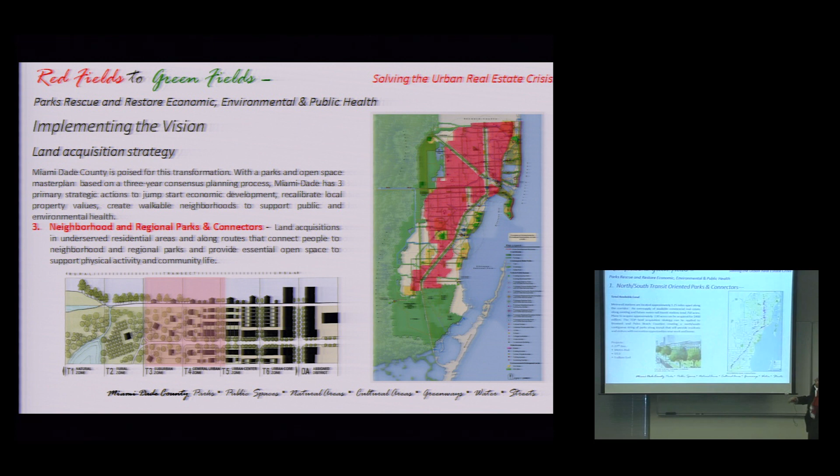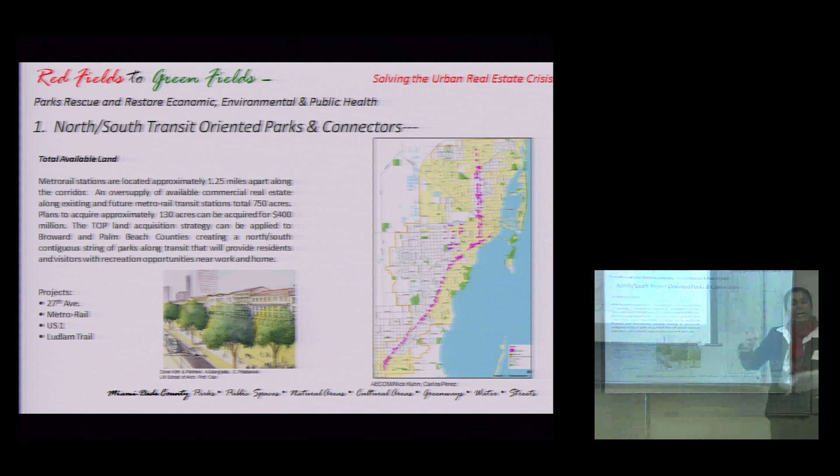Just some very brief images, and then we've got two other presentations. These are kind of the sites and the before and afters that we've been looking at in terms of how these sites would transform.

So we're looking at transit-oriented parks. This is a site specifically in downtown Miami, the core of Miami-Dade County. This is before and after. What we're looking at is transit and properties along it that are parking lots, empty sites, not in use now, and how can we recover them and make them usable for that area?

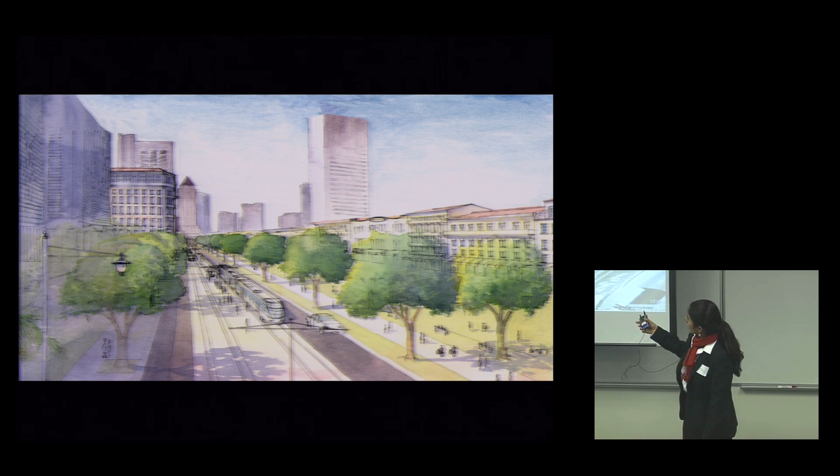This is another condition of a future transit line. What we're talking about is, once again, developing the transit-oriented park, and with the other slides that come with this, the evolution of the mixed use around it that we're developing now.

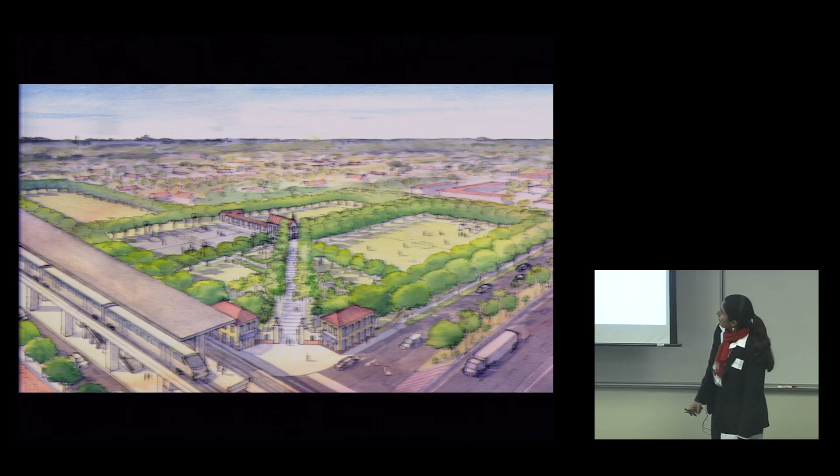Also, in terms of how these sites transform and really change the character of an area in terms of densification, when you have these connectors that may be very low density, they evolve to really include parks as the catalysts for how you redevelop in those areas.

Some of the discussions in our group involve a certain percentage of the developable land around it to generate revenue and other means of supporting this park. But equally important is the character of those areas, addressing issues of security, eyes on the street, and the kind of smart growth, new urbanist principles that we are applying to them.

This strategy of transit-oriented parks is one that can truly extend to the Tri-County region. In our case, it extends to Broward and Palm Beach.

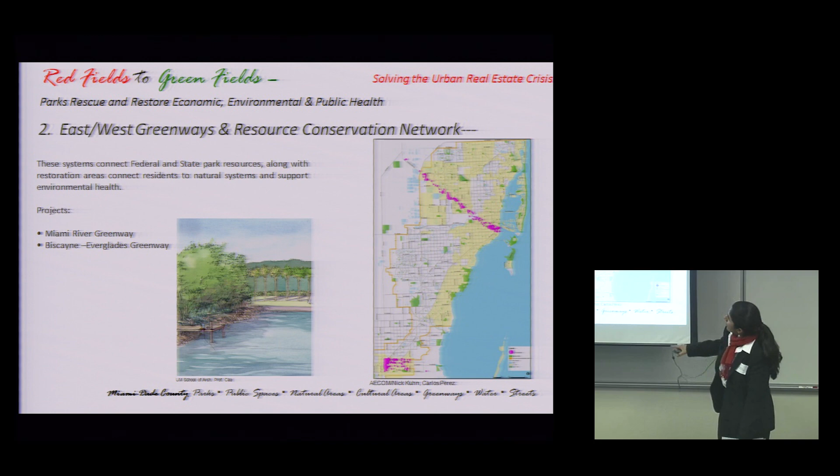Just some Miami River images, I'm going to quickly flip through this, and the Everglades Biscayne Greenway. This is a before image, and this is the after image.

And the neighborhood parks that we begin to look at. A lot of the sites we've looked at are commercial sites, but for Miami-Dade County, a huge amount of underutilized land is in the residential real estate market. So what happens with these sites where you're in a neighborhood and you have joining residential areas that are also failing? Parks as a catalyst can really begin to transform these areas.

For us, what it means is including things like workforce housing and affordable housing around them to really address those issues.

I'm just going to go through these next. This is one of our heritage parks that I mentioned, Greynolds Park, that we're looking at acquiring an interesting site there for a marina, transforming that area to serve as a mitigation site and a marina expansion site for the park.

So what are the impacts of a land acquisition strategy? John is going to talk about that.

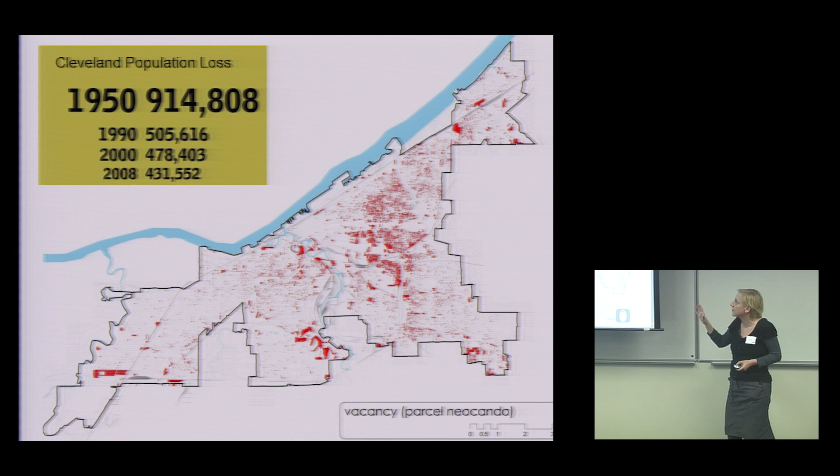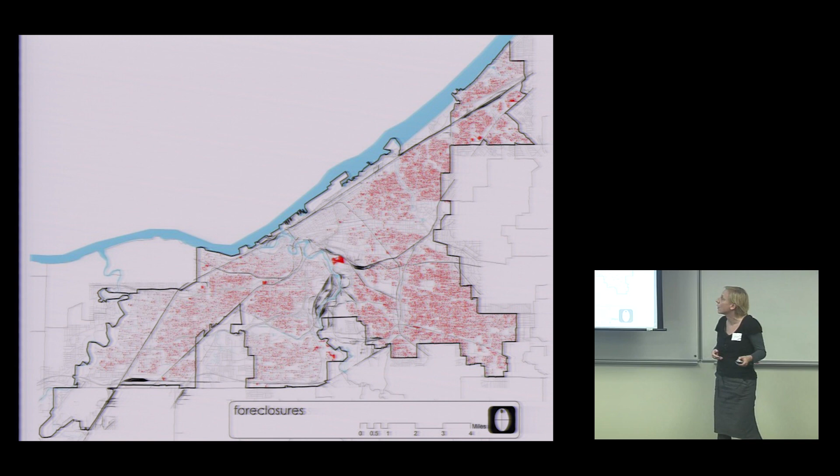When we speak of green space in this map, much like Philadelphia, we do not necessarily have a deficit of parks and green space. We have a park system that was designed for a city of 1 million people, so the thought of expanding that park system raises a lot of questions—one, about how to maintain it, but two, who are we building this park system for?

In the work we've been doing around vacant land, we've been focusing on a couple of areas. One: can we begin to find those vacant sites, shown in red, that are either adjacent to existing facilities or connect existing facilities as a way of expanding our green space network in the city and county in a way we can manage, given the realities of our population loss. But the important thing is that in Cleveland, it isn't necessarily more parks wherever we can fit them—we really need to focus on something more directed at a high-functioning landscape, because even though we have a wealth of green resources, we have some major ecosystem challenges, which I'll show you in a second.

If we can find a way to expand green space in a way that improves water quality, improves air quality, helps us address urban heat island effects, reduce carbon emissions—these kinds of things will provide the financial and ecological benefit that Cleveland really needs.

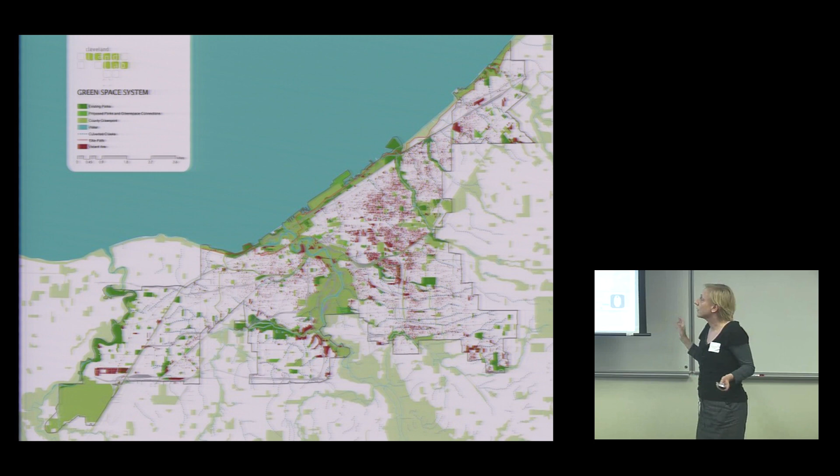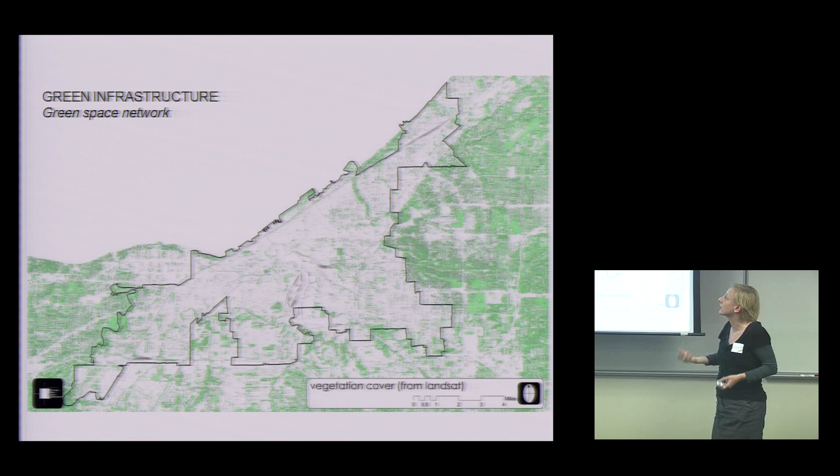Even though we have a lot of park space, we don't have a lot of mature tree canopy. There are more trees in Cleveland than you realize, but the black line is the city boundary, and you can see the suburbs have done a better job of preserving large trees. Within the city we have small street trees and some pockets of mature tree canopy. There are aesthetic challenges here, real estate challenges here, and pretty significant ecosystem challenges given how little of the Forest City—that's our nickname—remains as forest. So thinking about ways we can use our vacant land inventory to restore urban tree canopy is a real priority for Cleveland.

You guys are probably tired of all these city presentations, but bear with me—60 seconds of soil science and then we'll be done. The important thing is, the discussion this morning about green space wherever you can fit it doesn't make sense in our context. When you're thinking about high-functioning landscapes, the where is as important as the what. We believe in the what, the green space, but the where—where it fits within our city and county—is really critical from an ecosystem perspective.

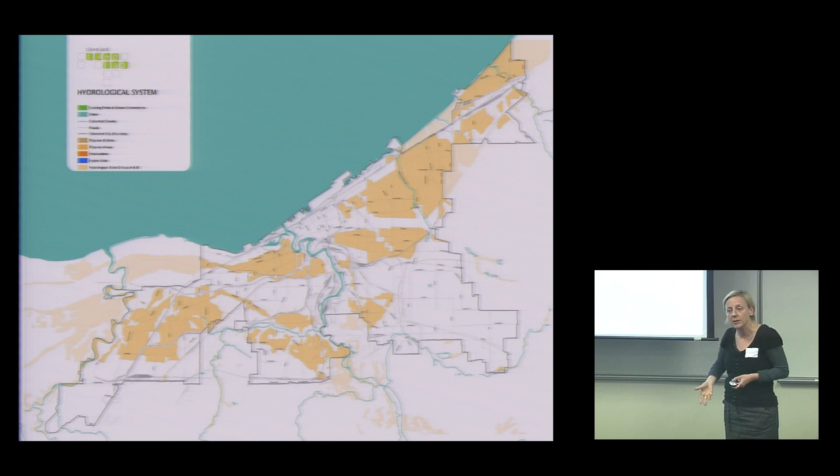What you see in this map in yellow are the areas of the city where soils have the most capacity for infiltration. You can do a rain garden or a bioswale wherever you want, but if you do it in one of these yellow zones, it's more likely to function the way you want, because the soil will meet you halfway.

Hydric soils—I'm not going to explain them except to say that hydric soils are the places where wetland function can either be created or restored. You can do a pocket wetland wherever you like, but if you do it in one of the blue areas, you're more likely to get the ecosystem function, the water quality benefit you're hoping to achieve.

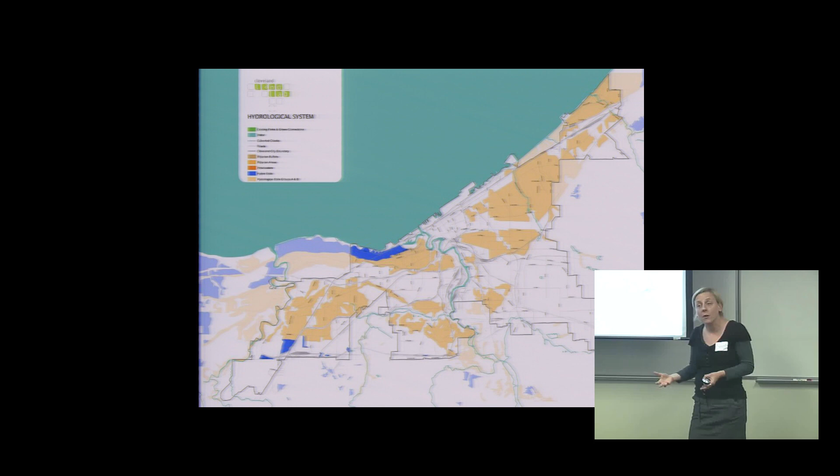To be honest, in the lower corner you're looking at the airport, and the upper area is one of the city's strongest commercial districts, so the likelihood of Cleveland giving up those economic assets for an ecological return is slim. But understanding the soil conditions is critical to making good decisions about where things should go and where they shouldn't.

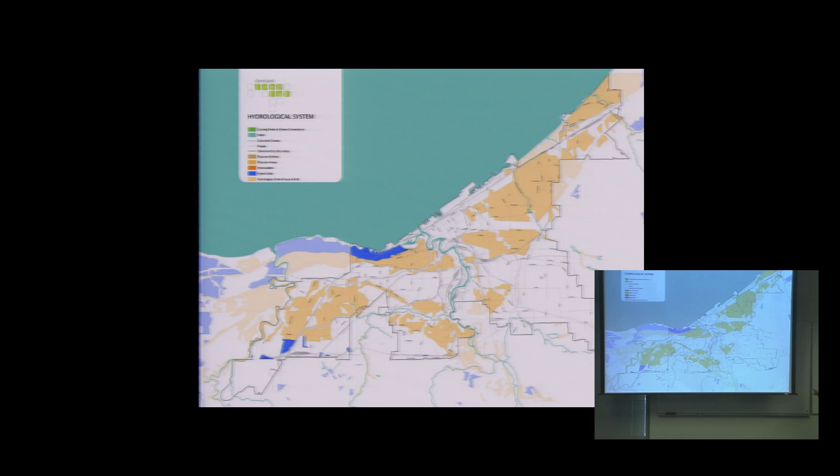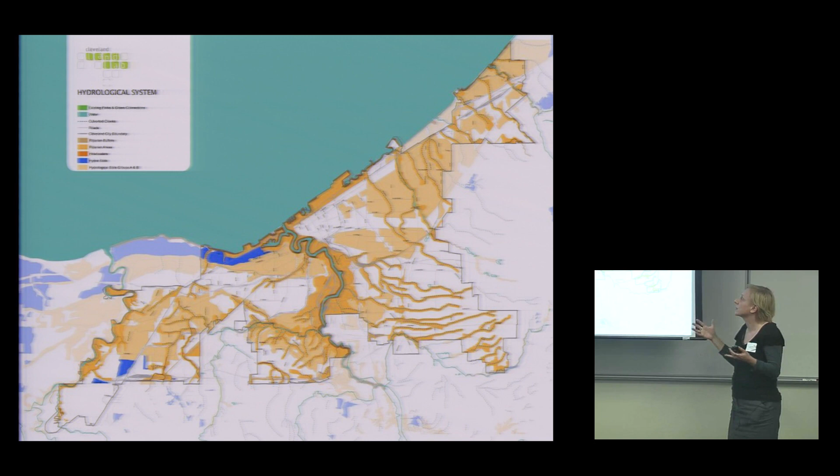This shows riparian zones—rivers, creeks, streams, and culverts. The darker brown areas show where a riparian setback should be maintained, and the gold areas show the riparian zone, where if water were allowed to do what water does naturally, these are the places where streams and creeks would expand to. The orange strips are the headwaters areas. If we're looking to restore urban tree canopy, you do it in the headwaters—you preserve and protect the high parts of your watershed, and develop down below. That's how you get a high water quality benefit, and it also helps improve the overall functioning of the hydrological system for the city.

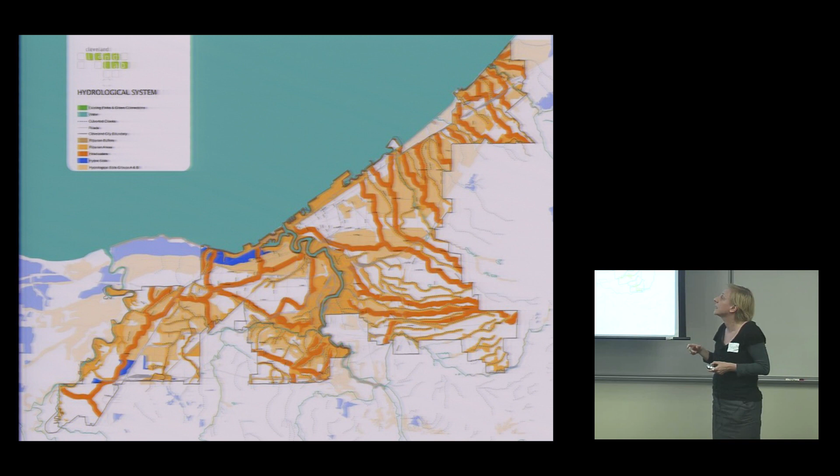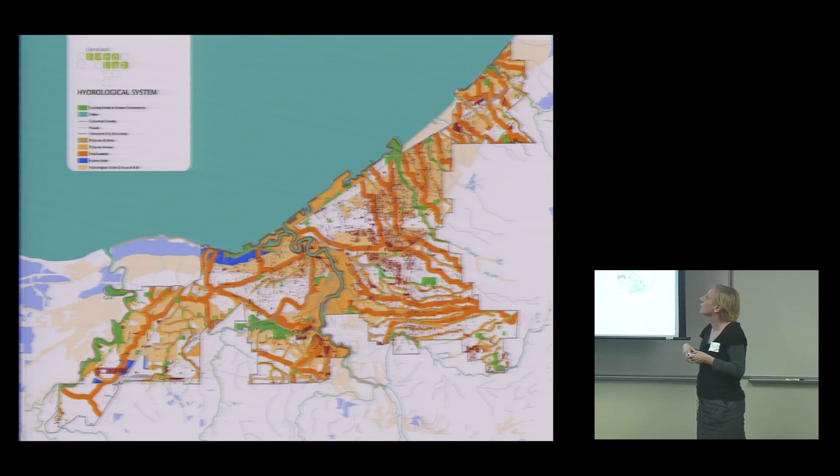Then you put vacancy on top. The whole idea here is that by understanding these prevailing conditions, it allows us to sort our vacancy and make better choices about where to develop and where to conserve, where to build green spaces and where to build townhouses and other kinds of more traditional real estate development.

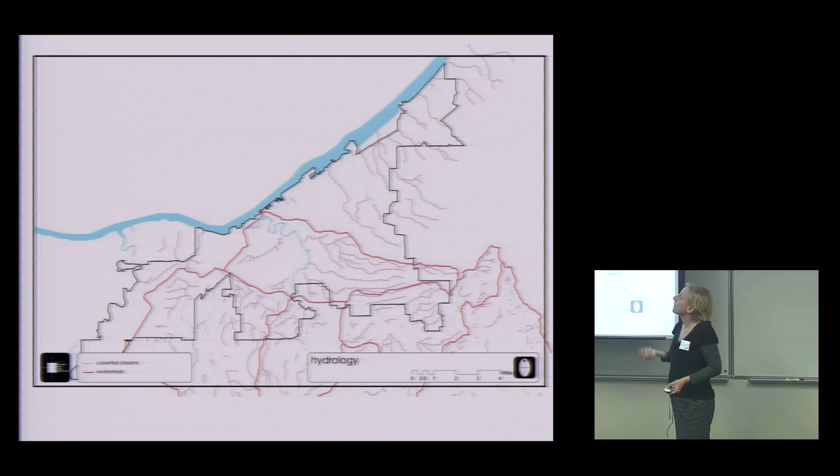When cities develop rapidly, you put water underground and got it out of the way so you could build on top of it. The results of all this culverting have been pretty significant in terms of a water quality challenge we face now. So if we map vacancy on top of hydrology and see where they intersect, we can begin to make better decisions about where not to redevelop.

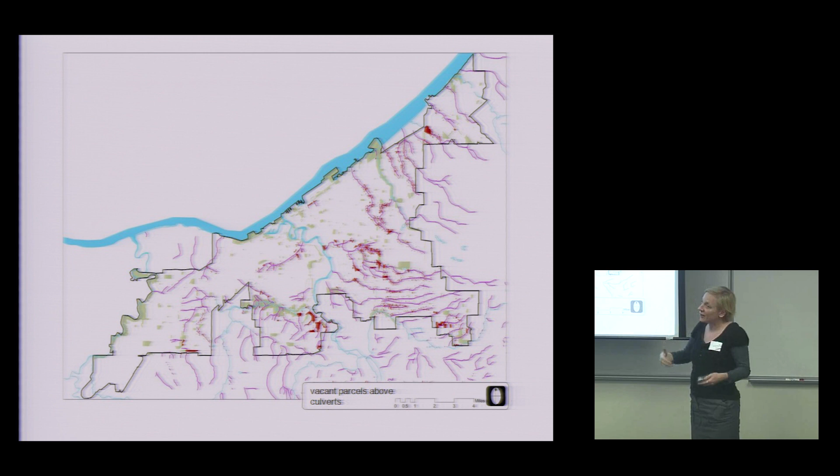It didn't make sense to build on water in the first place, and now that we don't have to, we can use our city land bank and county land bank to begin setting aside these parcels, either to daylight streams, which is very expensive, or to at least begin to restore surface hydrology through a series of vegetative strategies that can happen parcel by parcel.

We're not afraid of the billion-dollar numbers in Cleveland. Our combined sewer overflow problem is going to cost us $2.5 billion to address. So if we can use some of those resources, obviously a lot of those dollars are going to go underground into big gray pipes. We know that.

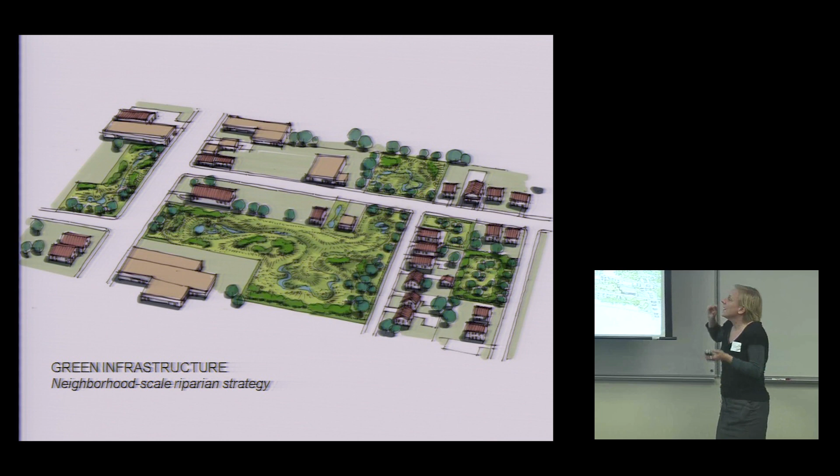But if we can use some of those resources to begin encouraging more natural patterns of water movement through the city and through the sewer district service area, we can reduce the amount of gray infrastructure required and create these kinds of amenities, which over time add up to a larger scale system. In a parcel by parcel way, we can begin creating this green armature that promotes development, improves water quality, and increases watershed function and wildlife habitat.

One important thing from a planning and urban design perspective, you guys are parks people, you know this. Water only goes one place. Water goes to more water. So all of these culverts ultimately lead to the Cuyahoga and to Lake Erie.

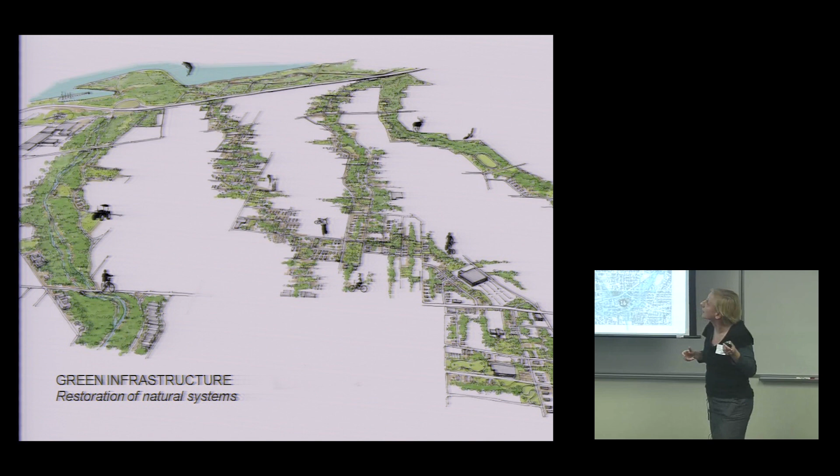The projects that Nora is going to speak to are the larger scale park and green space initiatives that can connect everybody in the city. Because if we create these little fibers, maybe not green fields, but green fibers, we create this mechanism for linking everyone in the city to our most significant natural resources in Cleveland. So with that, I'm going to give the thing to Nora so she can talk about the specific projects.

Did I do it in 6 minutes? You were great, right everybody? I talked too fast, but I really wanted to keep it short. I was just thinking, I don't know what's worse, going last or going after Terry. So I swear I'm just as smart.

I will be quick. Terry brought us to Lake Erie, and what I'm going to do is tell you quickly about our response to the Red to Green Challenge, which in Cleveland was $1.1 billion. We were happy to take on, but we've instead submitted a series of projects that will connect people to the water through the city and into the neighborhoods, looking at connections and linkages among the projects on the list, but also to other green and community assets in the city of Cleveland.

We don't want to build, program, or plan any of these projects in a vacuum. Also access. For too long, I think we've designed and planned parks that don't really take into account who needs to access them, the underserved, the residents, the visitors to the city of Cleveland. These have an accessible theme throughout them. And finally, design. We really feel that innovative, thoughtful design is what will help us create a series of destinations and continue the growth in Cleveland.

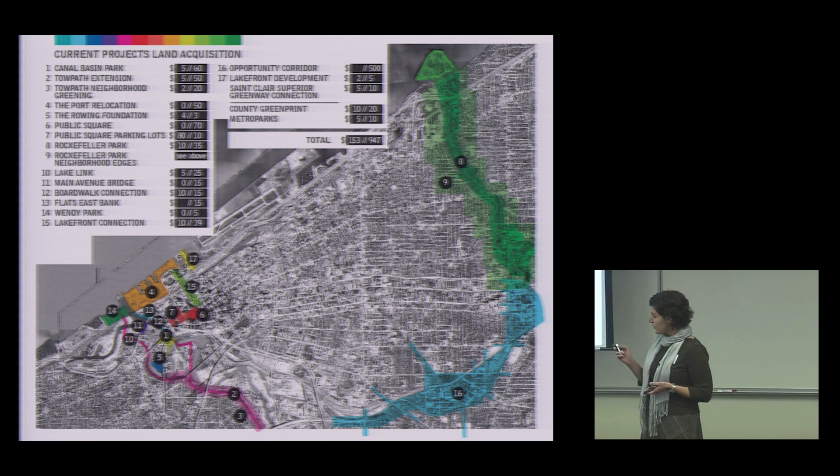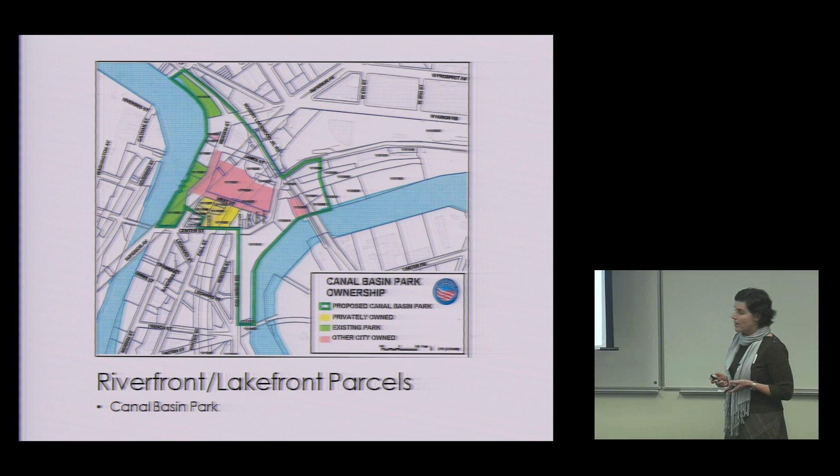Starting at the lake with Canal Basin Park, which is the canal that connects Lake Erie to the Cuyahoga River, connects to the Ohio and Erie Canal. This is thought to be the terminus of the towpath trail. This is an 18-acre series of parcels at the river's edge that we hope will conclude the towpath trail, which is currently a 110-mile bike and pedestrian trail that starts in central Ohio and Zoar, Ohio, along the Ohio and Erie Canal. It's a phenomenal project, but it does not have its final mile.

The towpath currently terminates just south of downtown Cleveland. We want to take it through to the river, connecting people from central Ohio all the way up to the Cuyahoga River and then to Lake Erie.

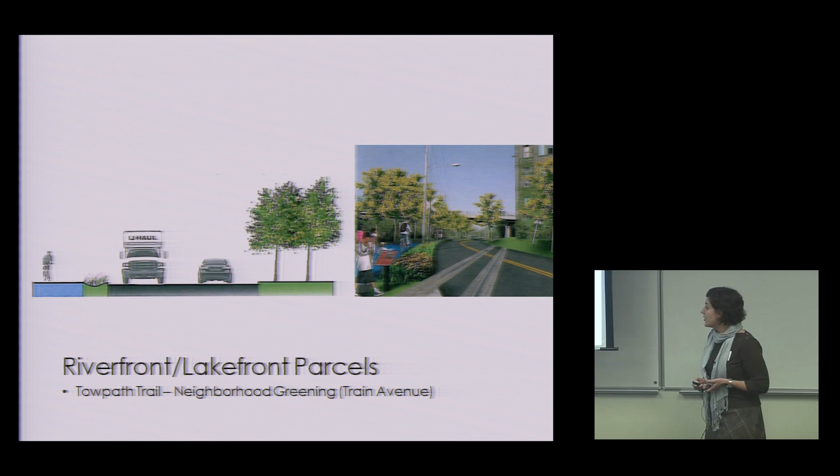Going along the towpath trail, clearly with a 110-mile pedestrian trail, you have a number of neighborhood connections. So how do we make it so this isn't a pedestrian trail in a vacuum? We connect it to the neighborhoods through old industrial routes, streets, through neighborhoods that have not touched the water directly ever.

This is a port relocation. Currently, the Cleveland-Cuyahoga County Port Authority maritime operations are going to move east. So what will we do with it? A 100-acre parcel north of Browns Stadium. The port is proposing a mixed-use development, commercial, residential. Planning has started and it's underway.

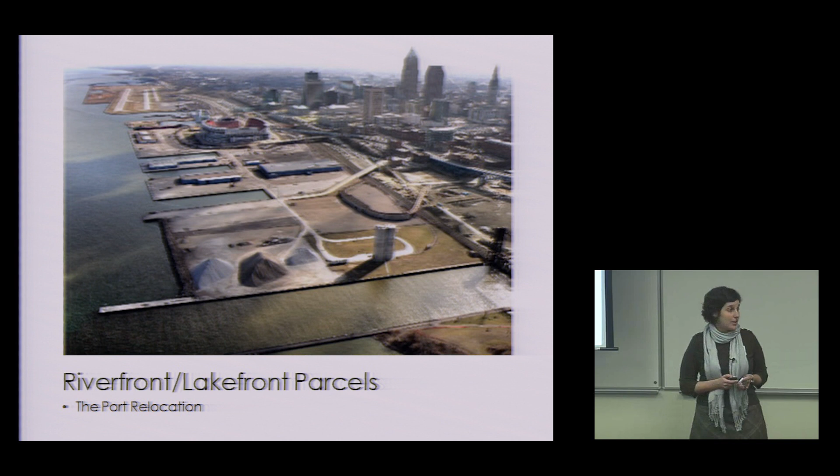The Cleveland Rowing Foundation is a recreational and competitive rowing foundation that looks to acquire a parcel - I don't know how big it is - maybe 6 or 7 acres, that will then spur additional commercial, recreational, and residential development around it. We hope for a collaboration with area schools, with a skate park that's going in there, with a bike co-op, and then with the nearby neighborhoods.

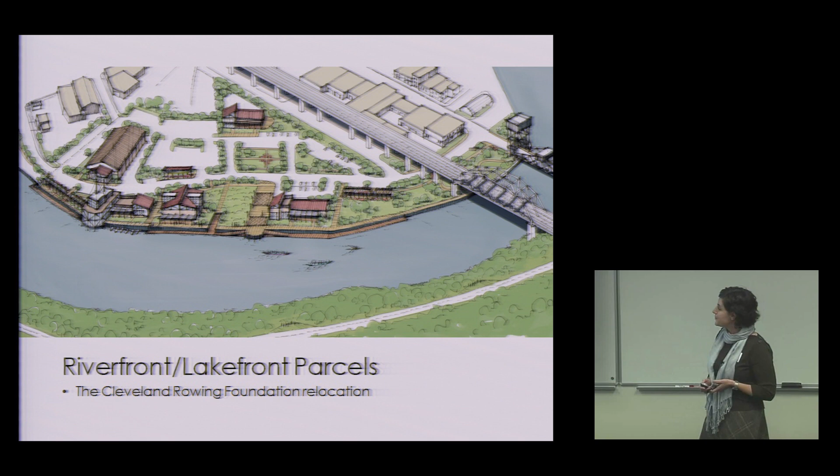Public Square redesign - we are lucky enough to have James Corner Field Operations, the designer for the High Line, working in Cleveland. He'll actually be in Cleveland on Thursday if anybody would like to join us for a Public Square forum. James, and Terry is on this design team as well, is taking a good look at Public Square, the center of Cleveland.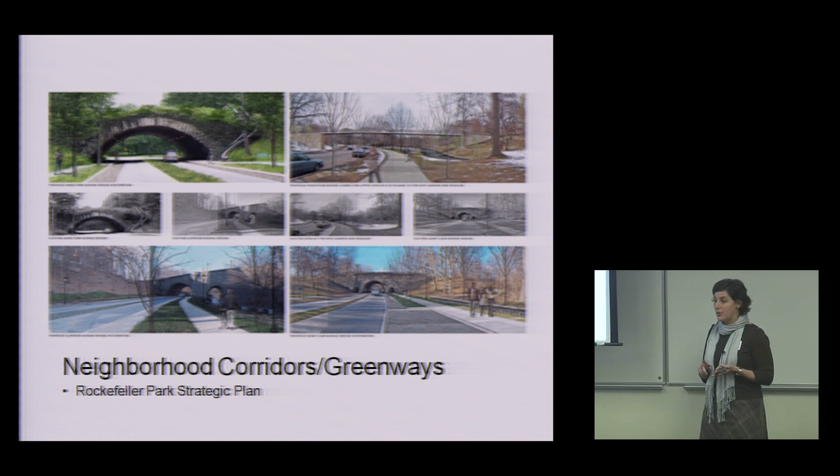The Lake Link Trail is a proposed pedestrian and bike trail that would take you from the towpath through the flats to the river and then to the lake. Parkworks has recently acquired a 1.2-mile rail bed to continue this bike and pedestrian connection from the towpath through to the lake, providing access to neighborhoods and to residents who have no access to the lake currently, but also to visitors.

The Lake Link Trail would then continue on to Wendy Park, which is adjacent to Whiskey Island, a major lakefront green space that has huge access issues.

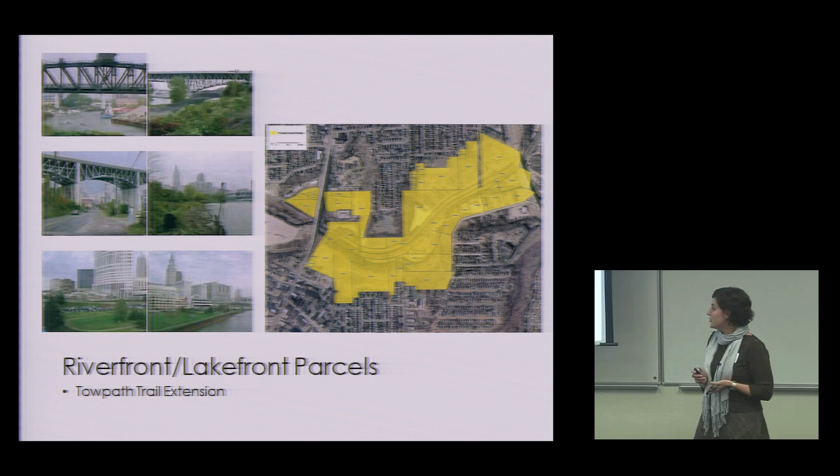The Opportunity Corridor is a 3-mile roadway that would connect I-490, which is in the Slavic Village neighborhood in Cleveland, to University Circle, our Eds and Meds Center. It's also home to a number of our cultural institutions, the Cleveland Museum of Art, the Cleveland Orchestra. This project is also a good point for design - it could be a roadway, it could just be a straight shot, and that would be it. But if we can impact the residual effect on the neighborhoods it'll go through - we're talking about 200 acres of the hardest hit, poorest neighborhoods in Cleveland - what would happen if there was a thoughtful process around it, thoughtful design, and then good green planning?